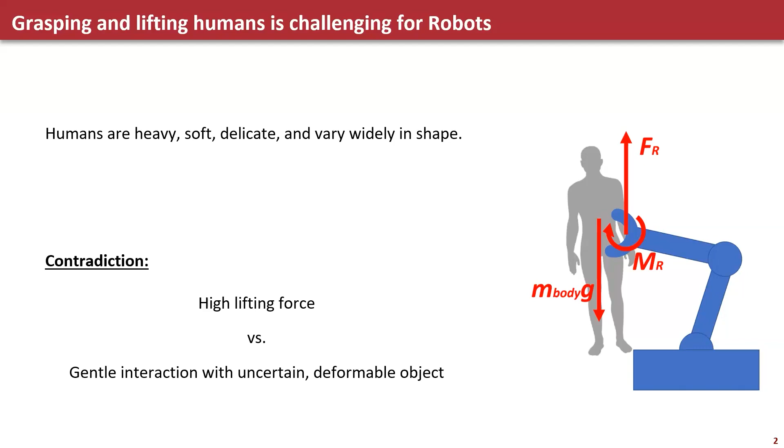Grasping and lifting humans is a challenging task that robots have yet to achieve. Humans are heavy, soft, delicate, and vary widely in shape. Thus, there exists a contradiction between the high lifting forces and gentle interaction necessary for safely grasping and lifting them.

Straps, on the other hand, are highly practical for lifting humans and are commonly used in the elder care and patient care industries. Straps can be wrapped around the human in various harnessing configurations to distribute the high load over a large contact area, and thus straps bypass this contradiction.

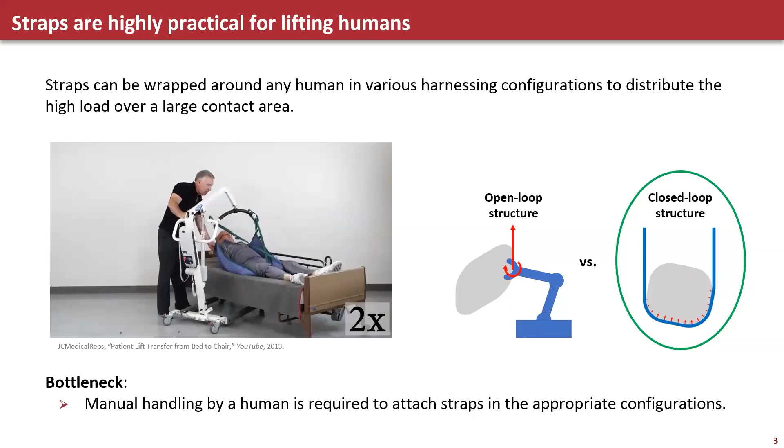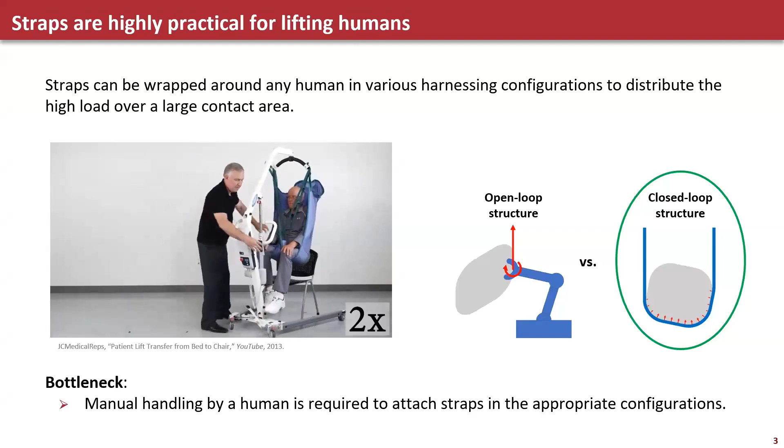However, straps require manual handling by a caregiver to attach them to the human, which presents a bottleneck in preventing the automation of this task using straps. A robotic strap capable of automating the harnessing process would allow for the automation of this overall task.

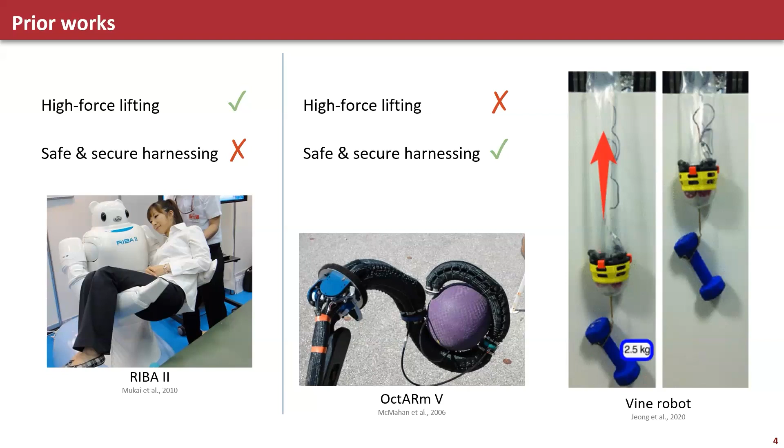In prior literature, a few robots have demonstrated lifting the full weight of a human for transport. However, these robots do not address the problem of safely and securely harnessing the human. Alternatively, soft robots can provide compliant and safe interaction with objects because of their soft material construction. However, they cannot bear heavy loads on the scale of a human body.

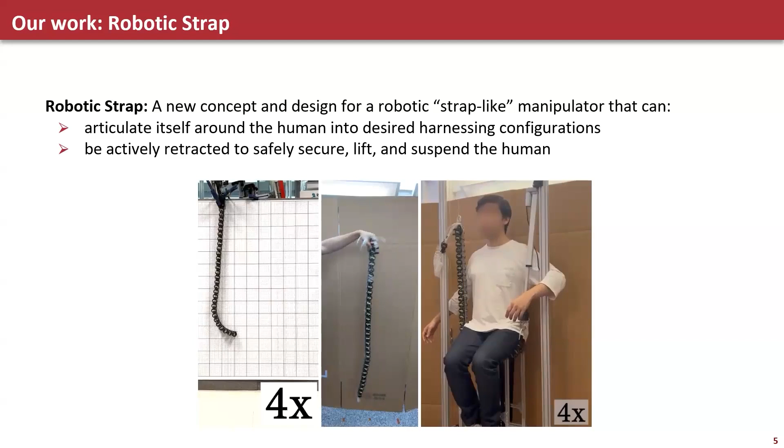In this work, we present a novel concept for a robotic strap-like manipulator that can articulate itself around the human into the desired harnessing configurations and be actively retracted to safely secure, lift, and suspend them above the ground. We define the robotic strap concept as a manipulator with an actuated strap-like structure that can articulate itself when active and maintain the passive strap-like behavior when idle.

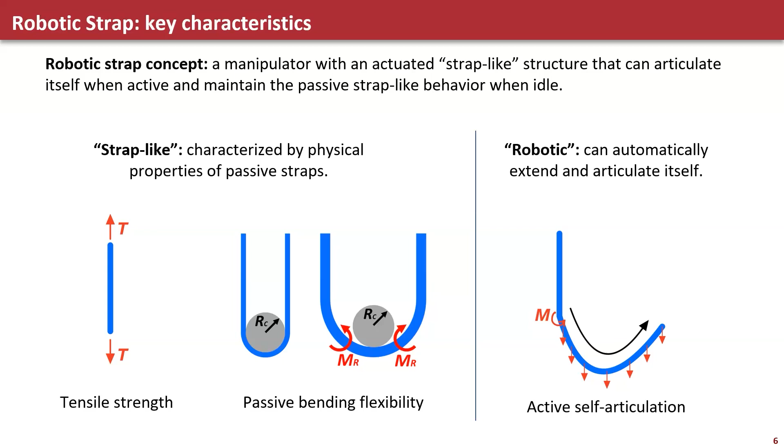The strap-like term indicates that the structure is characterized by the physical properties of passive straps that make them beneficial for harnessing and lifting humans, which are its high tensile strength, which provides its high load capacity, and its high bending flexibility, which we quantify in terms of the structure's passive bending resolution, resistance, and curvature. The robotic term indicates its ability to automatically extend and articulate itself around the body into the desired harnessing configurations.

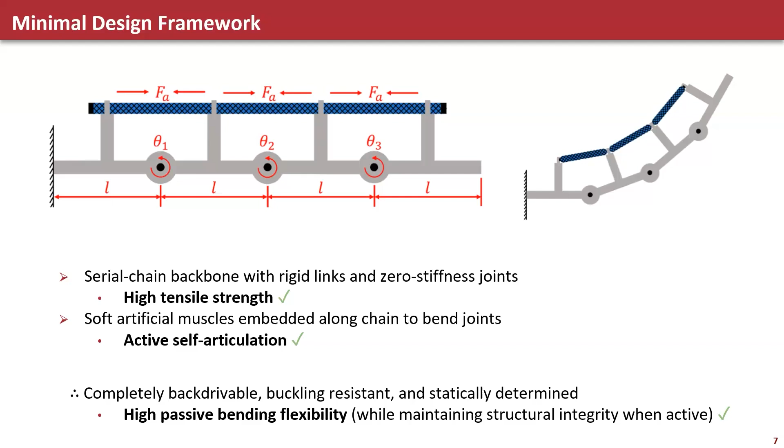We present a minimal design framework that describes the key fundamental features of the robotic strap design, which consists of a serial chain backbone with rigid links and zero stiffness joints, which provides its high tensile strength, and soft artificial muscles embedded along the chain to bend the joints, which enables active self-articulation. The combination of these features makes the structure completely backdrivable, buckling resistant, and statically determined as well. This provides its high passive bending flexibility while maintaining its structural integrity when actively articulating.

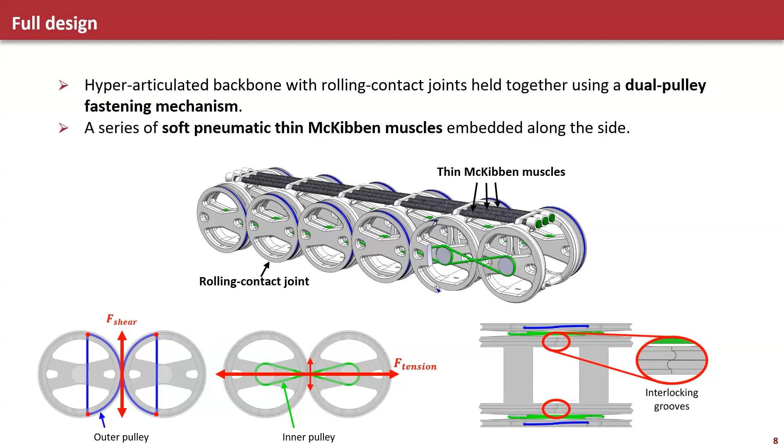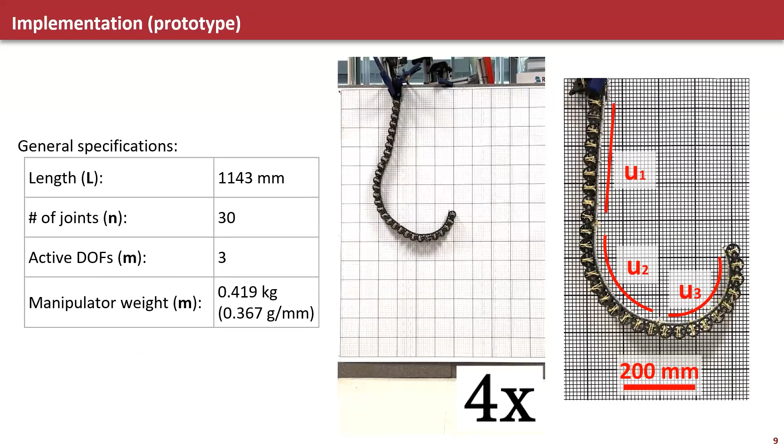Based on this framework, we developed the full design of the robotic strap, which consists of a hyperarticulated backbone with rolling contact joints held together using a dual pulley fastening mechanism, which provides a lightweight structure that can be pressed against the human body relatively safely, and a series of soft pneumatic thin McKibben muscles embedded along the side, which adds minimal stiffness to the joints. We implemented this design in a prototype that is over a meter long, has 30 joints, 3 active degrees of freedom, and weighs just under half a kilogram.

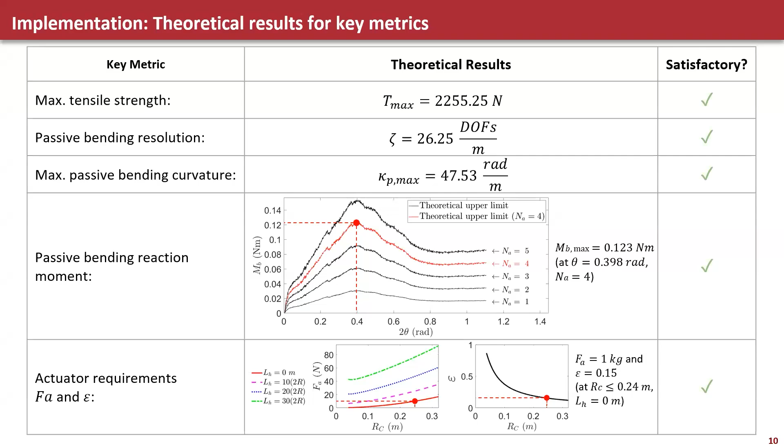We modeled the key performance metrics of the design in terms of its key parameters and calculated the theoretical results for our prototype. All our results showed promising performance for safe harnessing and lifting of humans. Our experimental characterization of the prototype also showed that its performance was sufficient for harnessing and lifting humans. Two demonstrations were performed to further illustrate the robotic strap's capability for automatically harnessing, lifting, and transferring humans.

The first demonstration shows the robotic strap's capability for harnessing and safely lifting the full weight of a human. Here we can see the robotic strap automatically harnesses the subject, lifts them, lowers them, and disengages the harness configuration.

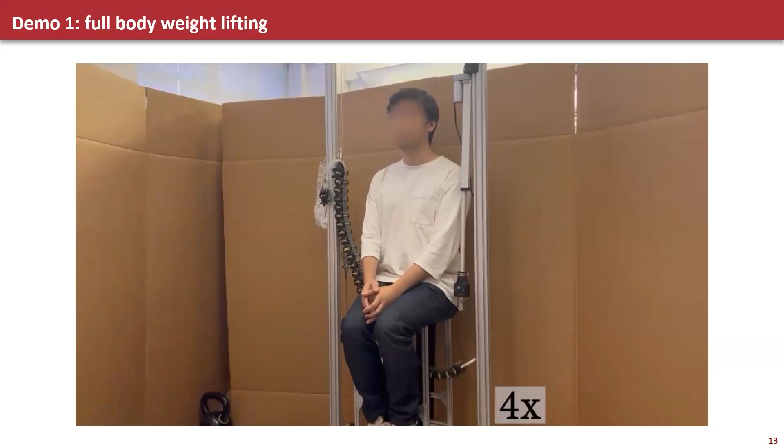The second demonstration shows the robotic strap's ability to perform a standard task commonly carried out in the elder care industry. In this case, we demonstrate a chair-to-chair transfer.

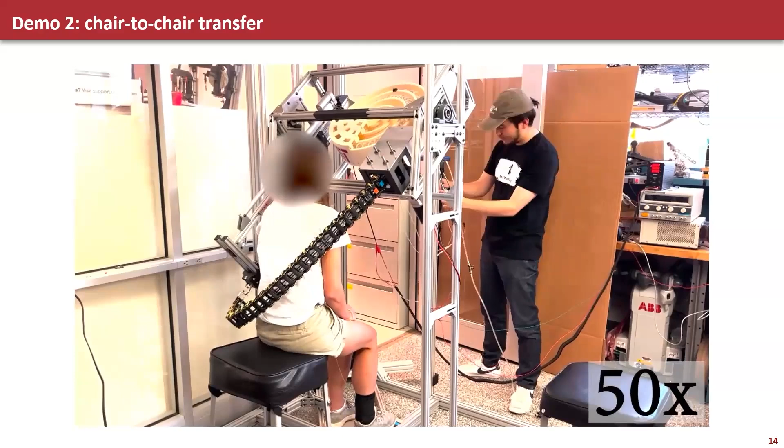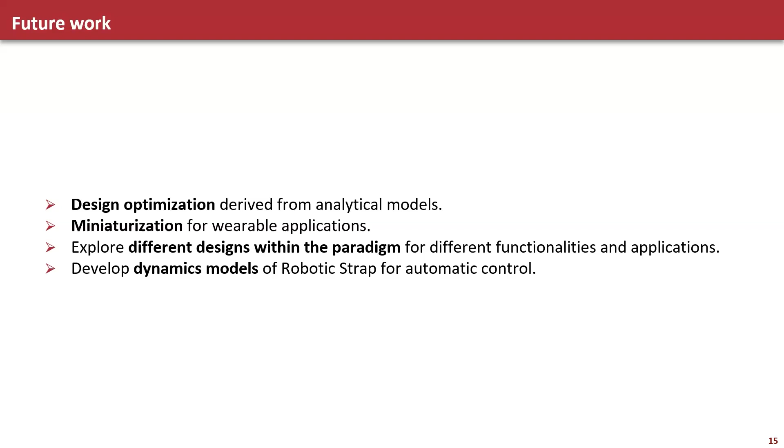Future work includes improving the performance of the robotic strap through design optimization, miniaturization of the robotic strap for wearable applications, exploring different designs within the robotic strap paradigm for different functionalities, and developing dynamics models for autonomous control.